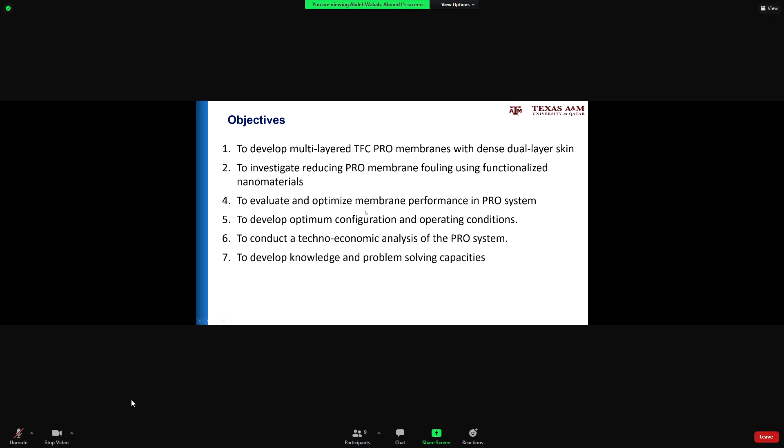Evaluate and optimize the membrane performance in the PRO system by doing the PRO experiments using synthetic and actual produced water. Develop optimum configuration and operating conditions for the PRO system. Conduct techno-economic analysis and develop knowledge and problem-solving capacity. So this was the six or seven general objectives for the work.

And the first, in terms of technical approach, the first task was to develop experimental and analytical procedure by setting up the test units, by also demonstrating the analytical procedures for the produced water analysis and treatment and so on.

And then the PRO membrane design and fabrication, basically to fabricate and optimize the membrane support layer, and also modify the membrane bottom surface to enhance anti-fouling, and synthesize the polyamide selective layer on nanofibrous support. This was mainly the Sydney contribution.

And then to evaluate also the performance of the PRO system, which is also distributed among the three institutes. Part of it is to acquire actual produced water and prepare model synthetic oil water, which was also done. Evaluate effects of water composition and operating parameters on the PRO membrane performance, and pre-treat the PRO source water.

And then the fourth task is system modeling and optimization, to develop a mathematical model for the PRO process that accounts also for the dilution effects without using empirical equations. And then find the optimized or optimum configurations for the PRO system, and do the techno-economic analysis based on that, and also develop design models that can be used to scale up the PRO unit.

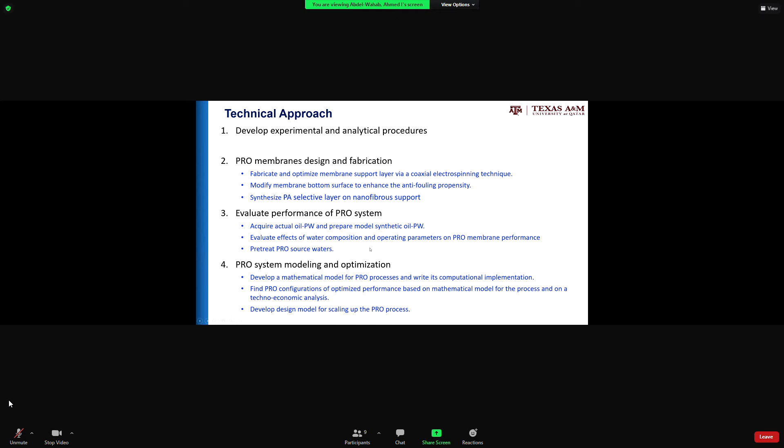This was the main kind of tasks that we had for the project. These are basically the test units at TAMUQ and also at ConocoPhillips. I don't want to go through them in details.

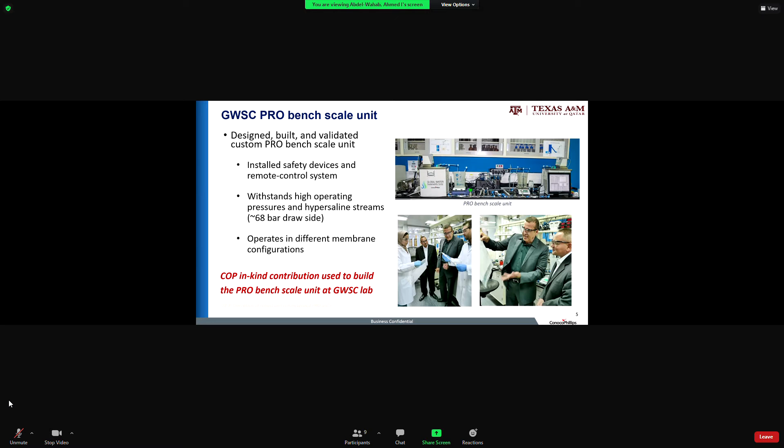But for the experimental part that we have done at TAMUQ, there were some challenges, and Khaled will talk about them briefly. I will just go very quickly through the modeling effort, especially the latest progress.

As you know, we have basically developed the model in order to be able to expand this to full scale plant, and the main issue was the dilution effects, because everybody has been using empirical equations that did not account for the dilution effects because they were based on the batch kind of scale or the lab scale units.

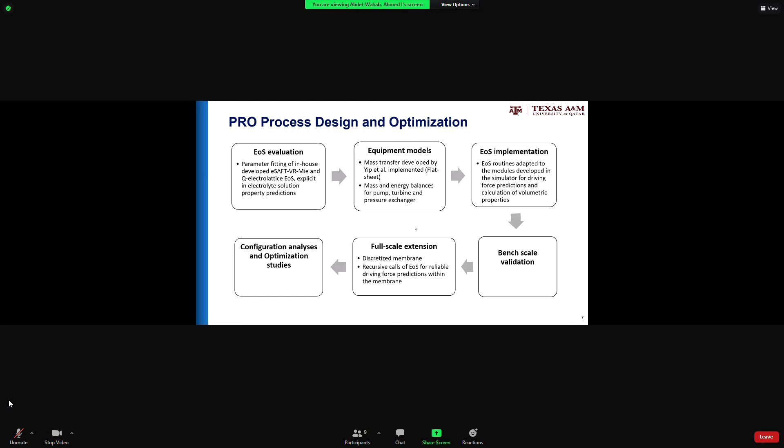And the main idea is to, instead of using an equation that assumes everything is ideal, or an empirical equation like the Van't Hoff equation, use mainly a sophisticated equation of state that's easy to use when you account for the dilution effects, and at the same time provides accurate predictions, especially for the osmotic pressure, and also combines the mass transport and the thermodynamics when you model the PRO system.

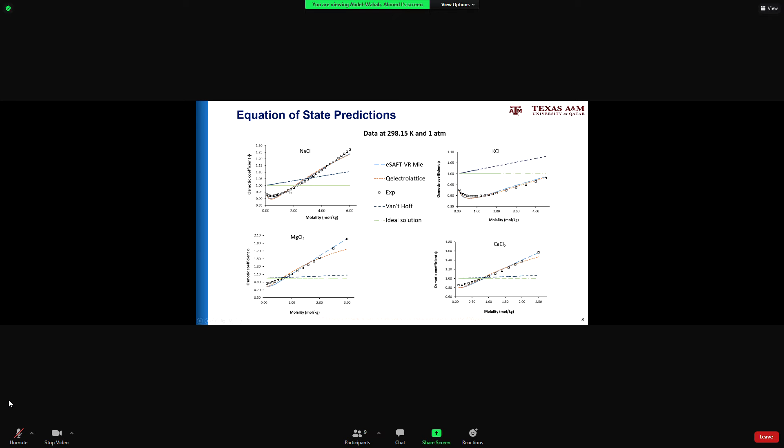And this gives you just a comparison between the osmotic coefficients predicted by the equation of state and the empirical equation. You can see that the equation of state actually very accurately predicted the experimental data.

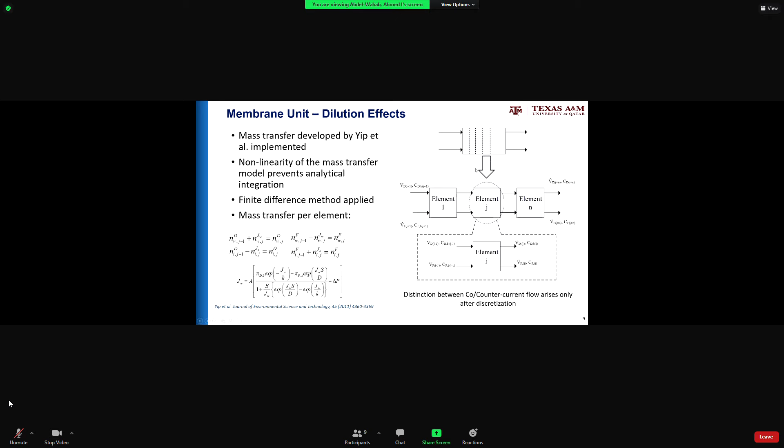And then we developed also the process to account for the dilution effects, where we discretized the membrane into slices, and each slice was considered as one membrane by itself in order to account for the effect of the dilution as you go through the membrane area for full scale. This will not make a difference when you talk about lab scale, but for full scale it makes a big difference as such.

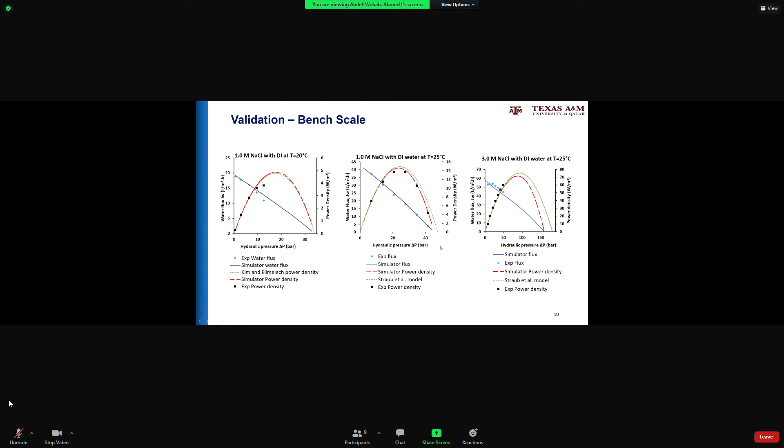After we did that, we validated the results. As you can see here, the model predictions actually fit the experimental data very well. Also, some of the data developed at the Global Water Sustainability Center was fitted using the model, and I think there was very good agreement between the experimental data and the model predictions.

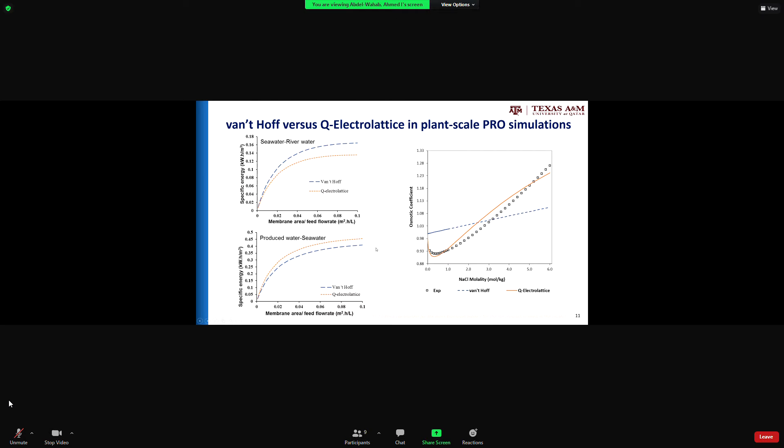We also extended this to the full scale after we discretized, and this shows the difference between using the Van't Hoff empirical equation versus the model using the equation of state. There's a difference in specific energy and also a difference in power density. We also accounted for the flow regimes in terms of co-current and counter-current flow, and the effect of both as a function of membrane area.

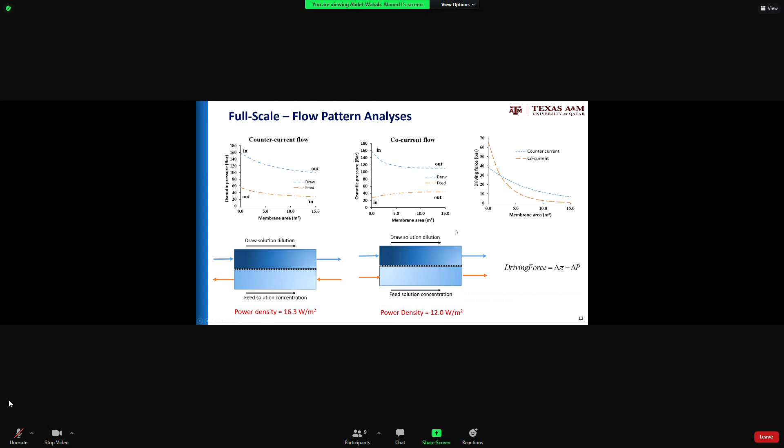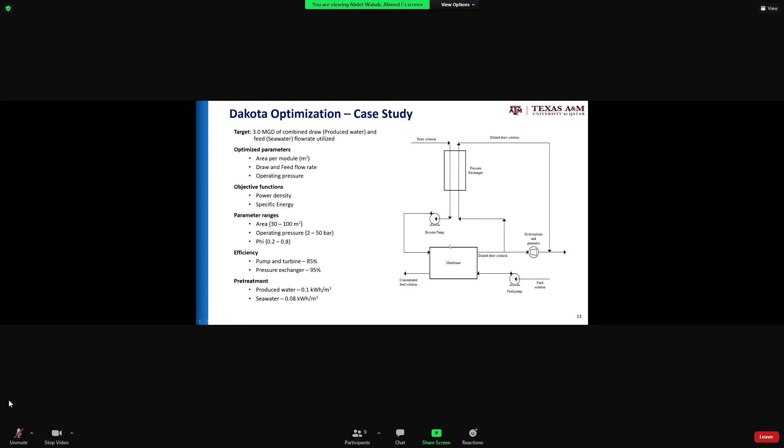We optimized the system by incorporating the Dakota optimization tool to see the optimum configuration of the system and find the optimum operating conditions. This has been applied, for example, showing the specific energy and power density together versus the area, telling you what the optimum is that achieves both optimum specific energy and power density at the same time.

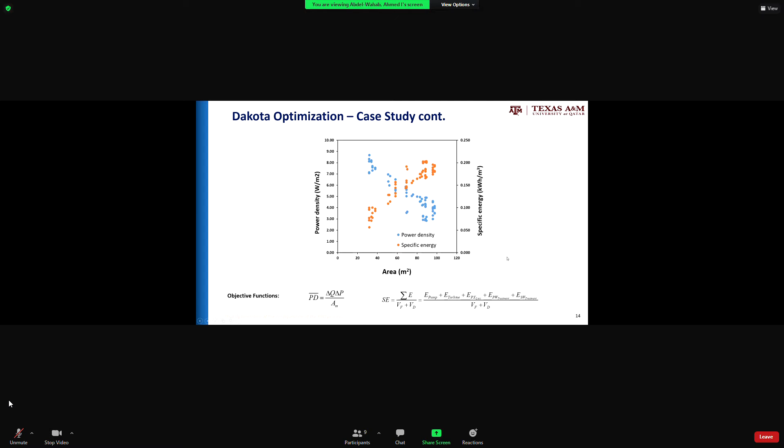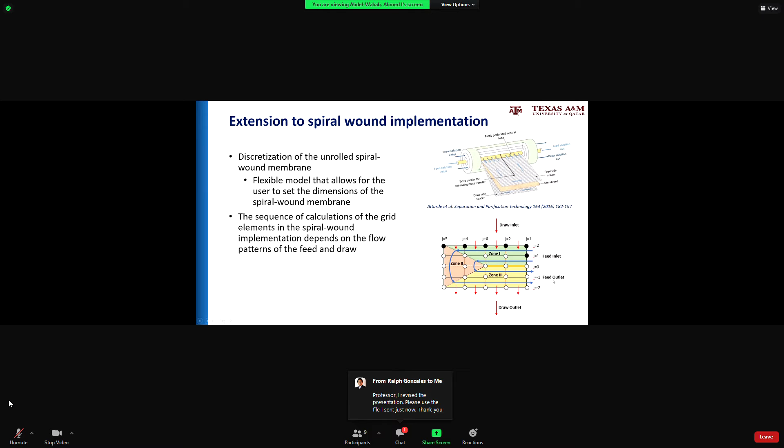We extended this also to the spiral module because that's what's usually implemented in reality. We did the same thing: discretizing and also slicing the membranes to simulate the flow regimes. We validated the model using experimental data from the lab scale.

We also compared the spiral module with both the co-current and counter-current flows. The red one is the spiral, the blue one is counter-current, and the black one is co-current. You can see that the spiral module's performance in terms of water flux and power density falls between co-current and counter-current, which is actually expected.

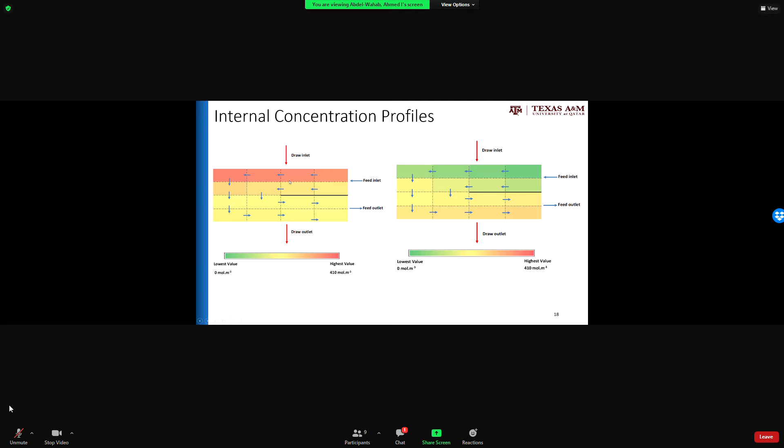That was also a nice thing that was done. So that's just a very quick summary. I can transfer to Khalid, but we can also transfer to either Sydney or ConocoPhillips to present their part, and then Khalid can come later to talk about some of the challenges we faced in terms of experimental work.

So what do you suggest, Dr. Salim?

Yeah, yes, I'm happy. I have a couple of questions about the modeling. Is there any more modeling that you need to do, or is that it for the project? Are we complete on this? I know Sally has just published.

Yeah, that's a very good question. For the modeling, I think what remains is mainly the techno-economic analysis. It's not directly related, but it connects in a way to the thermodynamic and mass transport model, in order to expand the model using what we've done and account for the techno-economics of the system.

That's what Elizabeth is doing now. She has already developed some cost models for different equipment and for the membrane system, which includes pre-treatment costs, construction costs, capital costs in terms of membrane costs, pumping, turbines, and all of these kinds of things. She's putting all of this together, and it will be incorporated into the overall model.

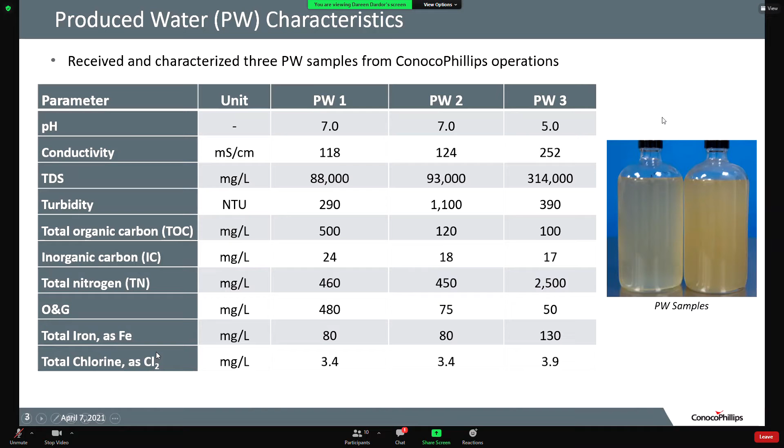Based on this water quality, we evaluated different pre-treatment technologies targeting the removal of mainly the organics and the suspended solids in the produced water, to enable its use as a draw solution for our PRO evaluations and to minimize membrane fouling as much as possible.

So we evaluated 3 pre-treatment routes, defined as extensive, intermediate, and minimal. Each was a combination of physicochemical and physical treatment technologies, including dissolved air flotation, or DAF, which includes a coagulant - we used mainly iron chloride as the representative coagulant - followed by cartridge filtration, either 1 micron for the extensive and intermediate, or 10 micron for the minimal pretreatment. The extensive route also included a final polishing step, which added powdered activated carbon (PAC) and microfiltration as an additional pretreatment step.

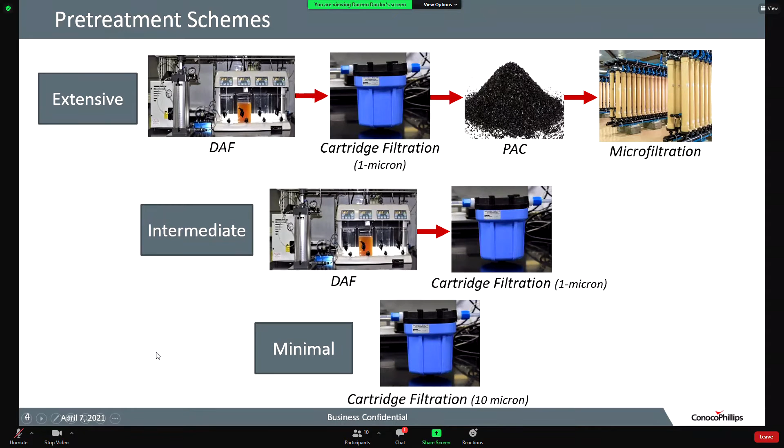In terms of turbidity, the minimal pretreatment removed almost 87% of the turbidity, while intermediate and extensive pretreatment removed all of the suspended solids and turbidity in the water.

For TOC removal, that was slightly less because some of the organics are naturally dissolved in the water. For the minimal pretreatment, we managed to remove 45% of the TOC, while intermediate and extensive increased that to 62% and 73% respectively. So that was the main analytical property we were tracking in the water.

So with this produced water treatment summary, we took that pre-treated water and evaluated it in PRO fouling tests to see the effect it would have on the flux of the PRO membranes in PRO operation.

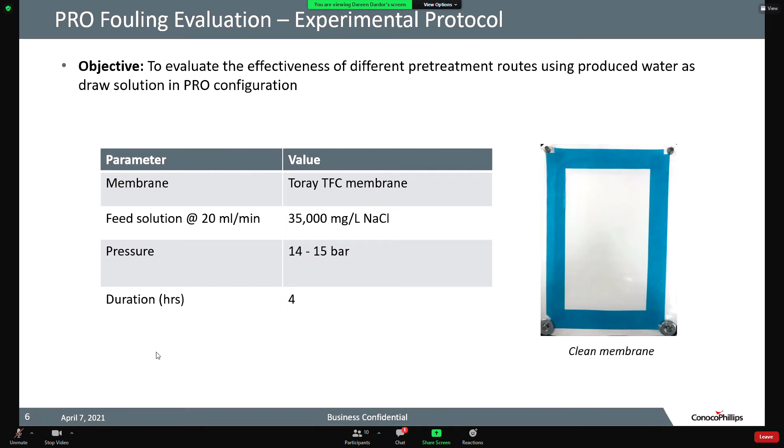We obviously had to start with a baseline, where we used 215 grams per liter NaCl, mimicking the salinity of the produced water after pretreatment. That was done at the beginning and after each of the fouling experiments. The draw solution flow rate was always constant at 0.6 liters per minute.

Then for the fouling steps, we used the actual produced water after pretreatment. The blue bars represent rinsing of the unit with DI water and overnight compaction with DI water before each of the stages.

The note here is that we included the addition of biocide throughout all the experiments to avoid the formation of any biological matter that would foul the membrane or affect its performance.

And then we had a learning actually. Darine, I was suspecting, because it really took us - maybe Khalid, if you do 2 or 3 cycles without a biocide, you would start to have funny data. I was wondering if that has been experienced by Khalid, but it was experienced by our team, and we solved it. We found that if you need to do not just one experiment but multiple cycles, you might need to consider that. So that's a lesson we really experienced.

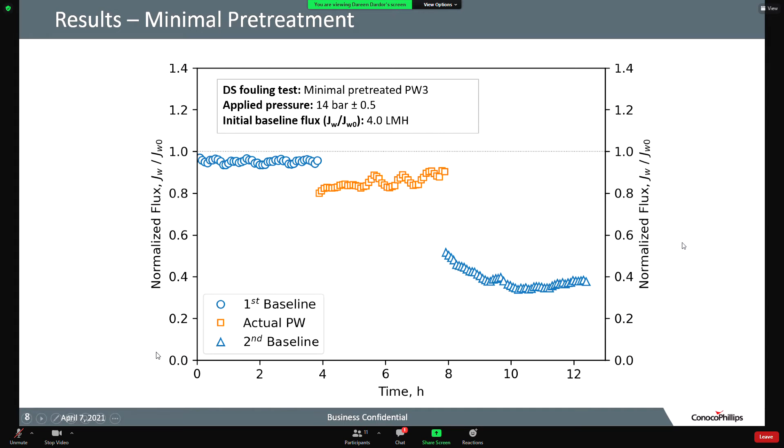by more than 60%. After that we even took out the membrane, and there was some brown and yellowish organic matter that seemed to have deposited on it, clear fouling of the membrane in agreement with the flux data.

So we tested the intermediate produced water on a fresh membrane coupon, and the normalized flux was stable at 1 for the first baseline, the actual produced water run, and the second baseline. We went further and tested the second actual produced water and the third baseline, and it was all around 1 approximately for all stages. There was just some fluctuation in the second produced water run, but that was recovered in the third baseline, so it could have been good pre-treatment, but not good enough to get a perfectly stable normalized flux.

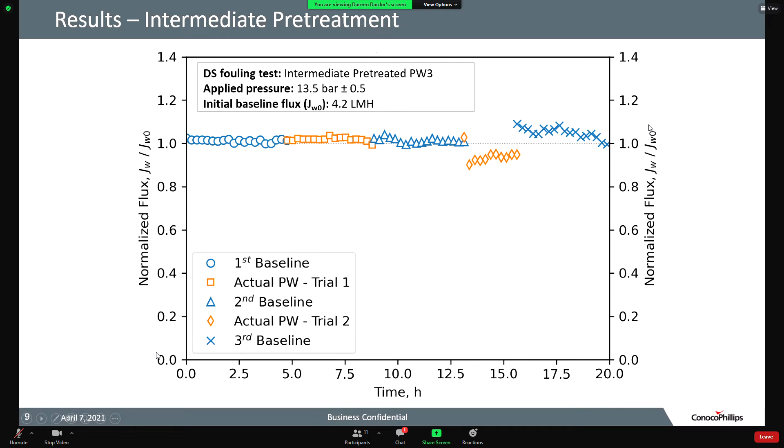So again we went with a new membrane coupon and tested the extensive pre-treatment, which includes the additional PAC and MF polishing steps, and here we got a smoother performance. The baseline and actual produced water runs were all at 1 normalized flux for the entire experiment.

We also validated this for different membranes as well as different water qualities. We tested it on produced water 2, with a different membrane, and also got a 1 normalized flux. So based on these results, there is no clear fouling observed at a bench scale level after conducting 2 cycles on multiple membranes and different water qualities.

This indicates that these pre-treatment technologies are sufficient to pre-treat the produced water for use as draw solution at the bench scale level. Further validation would need longer term testing at a pilot scale, where other issues could come up. As Dr. Samer said, we saw the biocide issue, which affected the membrane. Longer term testing with more cycles could show other issues, but at this stage the membrane performed stably in terms of pressure and flux throughout all of the stages, with no decline in baseline flux.

We were hoping, Darine, that it would be the intermediate treatment that works best, where the extensive is too much and the minimal is too little. The intermediate is the one we think needs to be optimized, which could be done better in a long-term pilot study. That's a recommendation for further study, because with the extensive treatment we don't want to seem inconsiderate that it's really too much to put that much treatment in place. But the intermediate is reasonable, so that's what I'm saying.

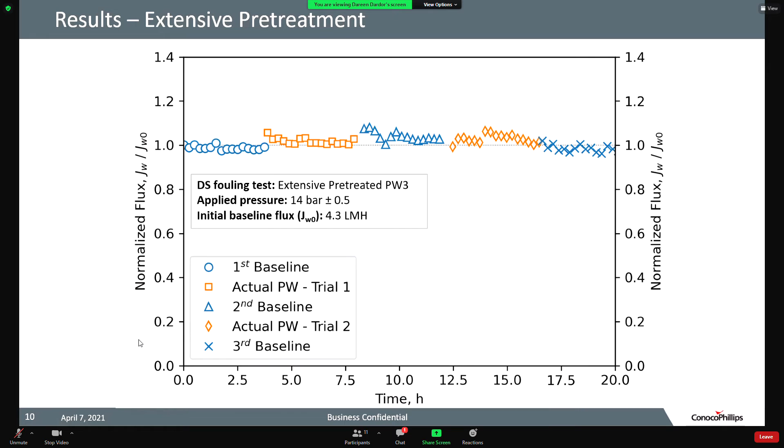Yes, correct, Dr. Samer. So that was the last slide about the pre-treatment or the flat sheet testing. We do have a couple of slides on the hollow fiber PRO testing that we did, and I'll start with the experimental protocol.

So this is based on our exchange of emails with Ralph and Dr. Sean later last year, as well as your published paper on the hollow fiber membranes in Desalination.

Quickly, on the experimental protocol: we started with pre-membrane conditioning at around 10 bar for 30 minutes. The feed and draw solutions were DI water and 1 molar NaCl, both at 150 ml per minute. The applied pressure here was slightly lower than the flat sheet, but we managed to operate at 10 bars and get stable flux as well. The membrane area for the coupons provided to us was 17.3 centimeters squared.

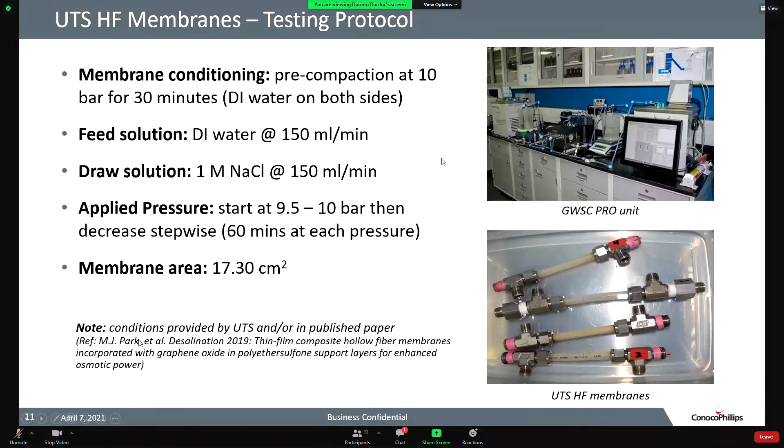This is again a picture of the membranes from the last batch we received and our bench scale system. When comparing, thank you Ralph and Dr. Sean, you provided us with average flux data for the different coupons, which was useful to compare our results and get an idea whether we were performing as expected in this configuration at the bench scale unit.

In this plot, for around 35 minutes, the average flux for membrane 2 when we tested it was around 12.2, and the orange squared data represents the average flux obtained from the UTS testing on the same membrane, operated at around 9 to 10 bar. We did get stable flux, and the salinity was also stable on both sides of the membrane.

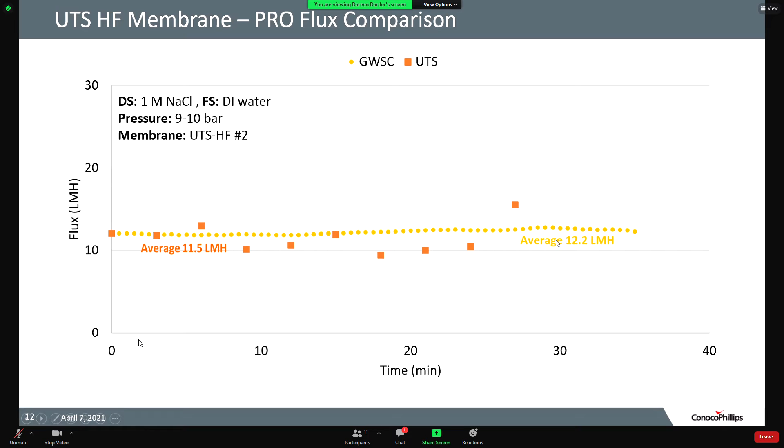We went ahead and tested the PRO curve for the membrane, doing a stepwise decrease of the pressure. Each point here represents an average of around 40 to 50 minutes of flux. You can see we do get the PRO performance curve, but since the pressure is quite limited, we don't see the full performance. This is also similar to data published on this membrane in the recent paper on hollow fibers by the team. So this was our initial testing for that hollow fiber membrane, and we did get stable power density and flux data for those membranes.

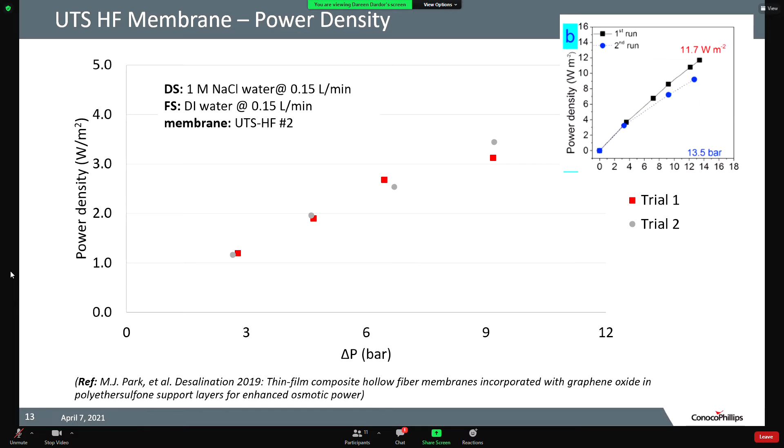As a summary of these outcomes on pre-treatment and the PRO evaluation system, here's how we see those results going into the final project based on the deliverables. For work package 2, related to developing analytical and experimental procedures, we've demonstrated the performance of the bench scale unit at both flat sheet and hollow fiber modes, did the initial bench scale hydraulic testing, and together with the team developed the experimental protocol.

For work package 4, to evaluate performance, the actual produced water composition comes into the picture, along with recent results on identification and implementation of sufficient pre-treatment, evaluating its effectiveness in PRO mode testing, as well as the power density output and validation against modeling from A&M, the work we did with Hosnain and Muaz earlier last year regarding power density output of these hollow fiber membranes.

Finally, work package 7 relates to communicating these results, as you said, in several publications already resulting from this project, as well as others in the pipeline that will report the recent data. With that outline, this is the last slide I'll present, covering the key conclusions from our side of the testing.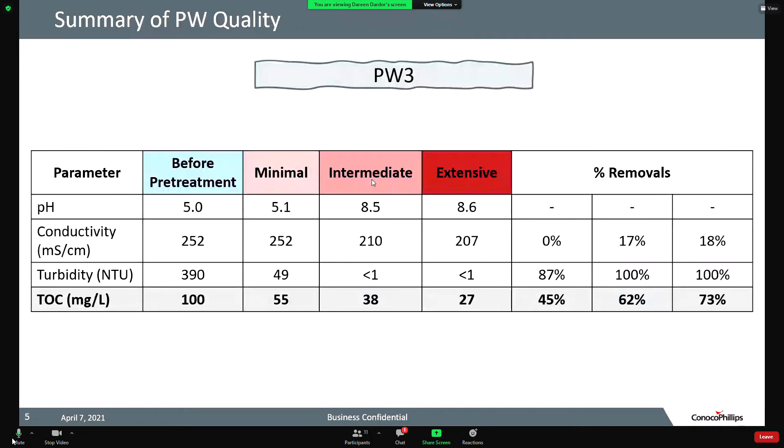All right. When I look at your produced water versus the seawater concentration, I see your flux is very low, like around 3 to 5 LMH. So when you use the produced water, even though your TDS is 300 grams per liter giving a very high osmotic pressure, it looks like it's not really generating much pressure from your flat sheet membrane. So when you're considering this kind of actual pressure versus real operating pressure...

So is it really true, like Anil mentioned, that pressure may affect the hollow fiber? And when you're comparing the flat sheet and the hollow fiber, even though there's a very high osmotic pressure difference, is it possible to generate more than 3 LMH flux with the hollow fiber compared to the flat sheet membrane, with stable membrane pressure tolerance? Is it possible or not?

Yes, I think at this salinity, the flux for the hollow fibers would probably be higher. One issue we saw with the flat sheets, when you don't have DI on the feed and the feed is also a saline solution, the effect of ICP and ECP is great, and that's why the flux is much lower than what we were anticipating. For hollow fibers, we think that effect will be less, and the flux we'll be able to get out of this very high saline draw solution would probably be higher, and that's something we also need to test.

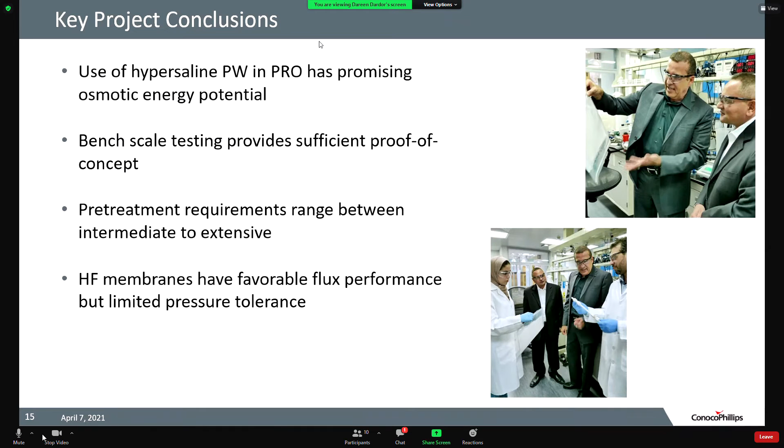So sorry, but I'm familiar with what Dareen is having, so it was a good timing. But I have seen the question. Sean, I think, ultimately, what Dareen is saying is rather than the absolute value, for our focus it was really the relative normalized flux compared from one pre-treatment to another. But you're right, actually optimizing the flux and membranes, that's a different focus.

Any other questions? Then go ahead, Dr.

No, I just want to make sure, so I think with Dareen, okay, when she said the final report, we are, in a way, if you look at what we have promised in the proposal, I think we have check-marked a lot of those activities. So I think Dareen and I might do a quick screening on the hollow fiber membranes, a quick screening of the pre-treatment strategies that we have done.

We think at this time, the reason why we really put a lot of effort into this project in 2020, with the COVID issues and all of that stuff, and then part of this year, hopefully by the middle of this year, we have really put a lot of in-kind contribution towards this project. So I really could not do a lot more research work on it as it takes time.

So we're trying to kind of initially diverge and now converge in a way. We're really trying to finish up a lot of the experimentation by middle of this year. Hopefully, from our side, we have addressed most of the requirements of the project. If we want to do other things, it probably doesn't have to be under the umbrella of this project. We could do it outside of that.

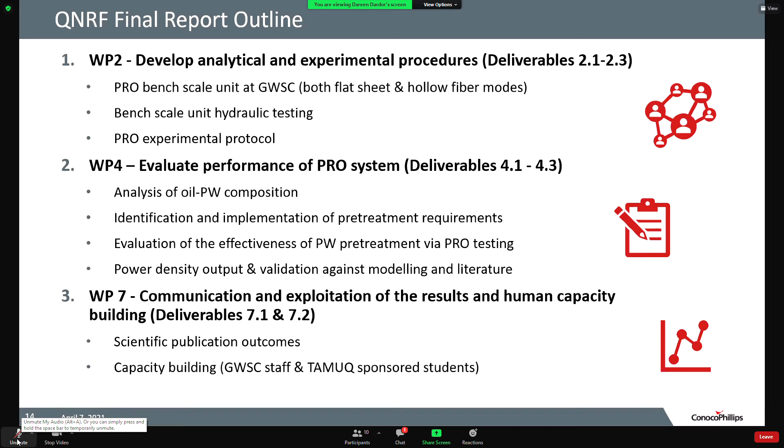We will never promise that. Yeah, sure, I fully agree, and I think I fully agree with you.

I'd like to extend appreciation to Dr. Shon and his group for providing the membranes and being so helpful with Dareen, providing the hollow fibers and also the data that they have provided during this testing. So thanks to Dr. Shon and his group as well. We should hear from Dr. Shon if they have any new data or something on that.

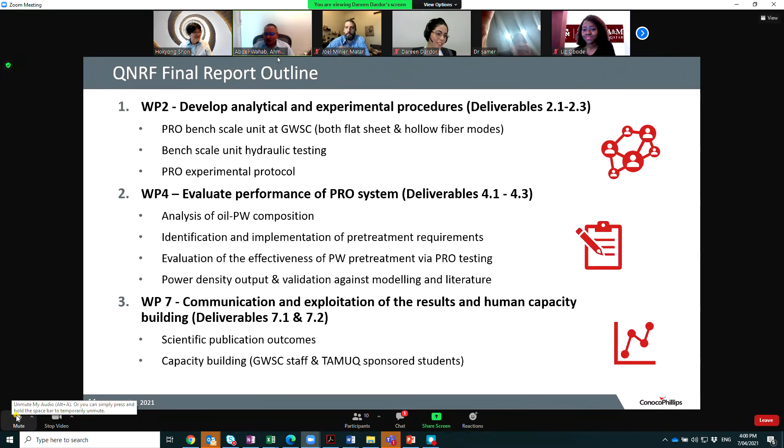Sure. So should we maybe go next to Dr. Shon's team and see? Okay, go ahead. Okay, let me share my screen. Okay, can you see the screen?

Yes, great. First of all, I would like to thank TAMUQ, Ami, and GWSC, Samer and his team. It's very honored to work together with them for the last 3 to 4 years. It has been one of my best experiences to collaborate with the industry and university. We have a very clear target. We are in charge of the membrane fabrication and operation from ConocoPhillips, and Ahmed is very well organized with all the necessary progress. So thank you for all your support. We are very happy to reach this level of performance.

Today we prepared our presentation mainly for the PRO membrane. Some of it you already know, and some of it is new data we are happy to share. My contents cover the review papers on the PRO process and membrane development, so we will discuss the current status of PRO, what's the commercial opportunity, what's the largest scale around the world, and how we can get to the next step of our good experience. ConocoPhillips has already developed real produced water and hollow fiber flat sheet testing, and we can discuss together with Ralph how we can go to the next step, as well as our current review paper, perspective, and future of PRO.